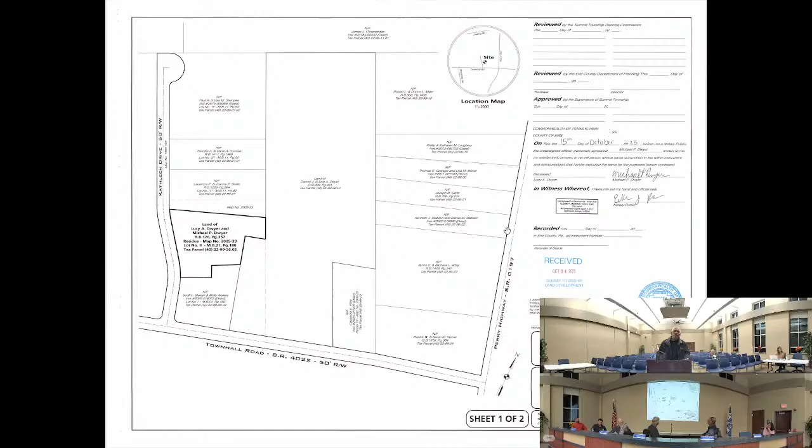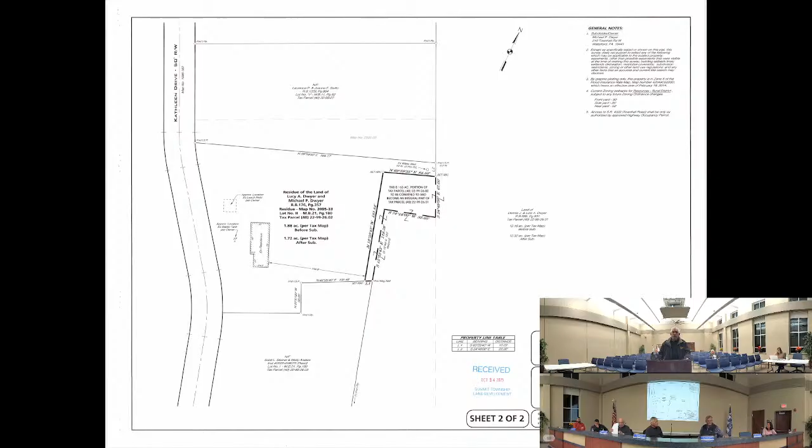Any other questions? Call for a motion. I'll make a motion that we approve as presented. Second. Discussion? All in favor? Aye. Motion carried. Thank you. Next on our agenda is Erie Sports subdivision.

From this project, for several years now, hopefully today we can take a positive step forward. Basically the plan we have presented here today is breaking apart property 300, which is the main parcel of the sports park where the ice hockey rink and that building reside. What's transpired over the course of several years is they legally split the parcel, but it's not actually divided. So it's under one tax ID, but there are two separate owners that have owned the parcel and ran different operations under that same parcel. The piece that we're proposing to break off is the dome facility and the AHN building, as well as the old fun park area.

The reason we're looking to move forward with this is the owner is actually looking to sell the majority of the sports park. So as part of the sale, the people purchasing the property want to have that property divided so it's in their ownership legally and not under someone else's tax ID. The only caveat is we are taking a small part of 305, which is kind of the southern property there, and it wraps up to the side. The reason for that is it's required for the parking ordinance, to maintain the proper parking spaces for the AHN facility. And the piece that we're showing to basically consolidate with the subdivided piece is the old basketball court.

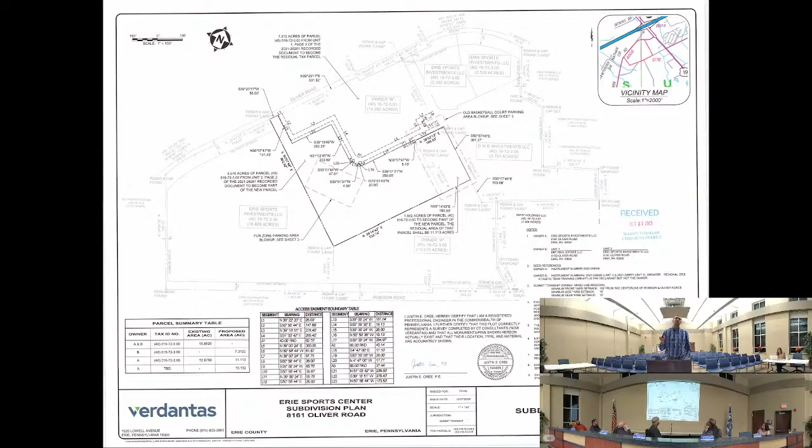Okay, now, so there's no plans to add anything here, right? Correct. So what this dashed line is showing is the existing access agreement, basically for shared access through the property. One of the things we've discussed with Tammy and Matt over the course of this project is keeping that maintained and operable for safety measures, site access for EMS vehicles, things of that nature. All we did was push this out, so it's in compliance with the frontage requirement, which actually perfectly abuts the edge of that access easement.

Now, something else to be aware of, this is kind of just an intermediate step. The future owners, whoever that ends up being, because he has several interested parties, the long-term goal would be to consolidate all of this into one continuous parcel, therefore eliminating this. So we're not done here. No, far from being done. Eliminating the side setbacks and interior setbacks, because ultimately they want to do a lot of development on the property. It's going to be hopefully a great project for the township, but this is kind of the first step as far as selling to an interested buyer.

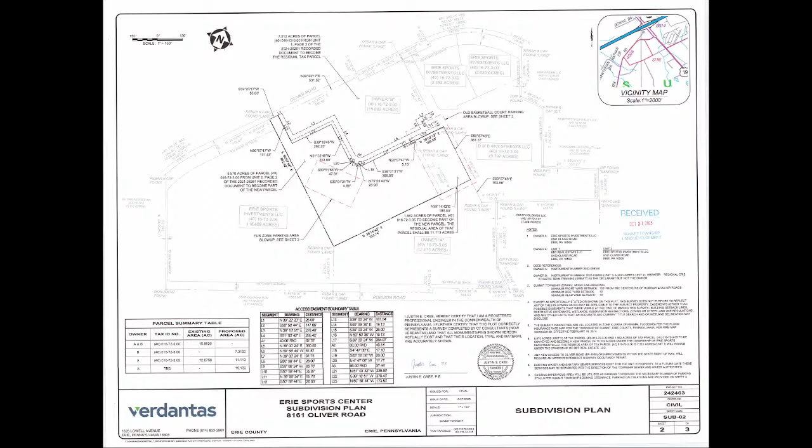Yeah, sure, yeah. The concern was for EMS vehicles. Yes, as you mentioned, I just didn't want to see anybody get boxed in a way that if an emergency happened... these are events that attract large numbers of people. Sure, and lots of times you'll have a lot of vehicles in and out, you know, God forbid should something happen. Yep, so that's my number one concern, and I think there's a lot of moving parts here.

There's all kinds of legal aspects to it. Yeah, part of what's been discussed, again this is kind of all conceptual now, is actually bringing a secondary access down to Robison Road here. We're working with the water authority to develop a new water line through here. So, long-term vision, there'll probably be an additional access point off of Robison that would connect Oliver to Robison.

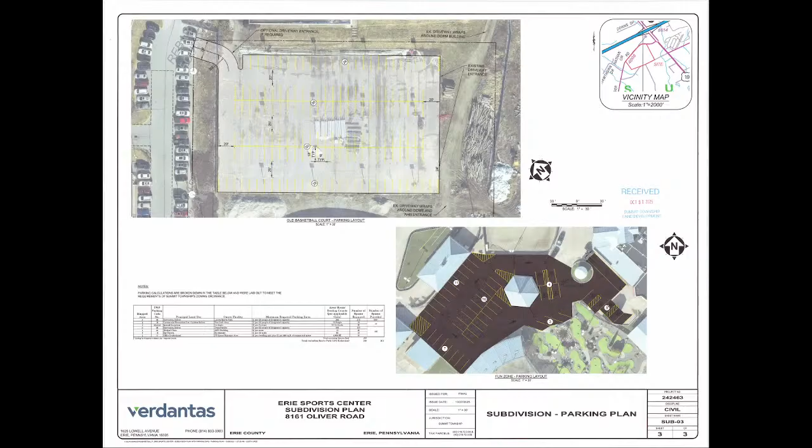So this is basically all existing. There's a slight portion here that is not being utilized. This piece on the back end, maybe there's a foot or two that's not paved currently. And then this is the fun park area. This is kind of that ramp right in the center that I was talking about that you come up to. This is the main entrance, and there's that big golf, soccer ball dome that welcomes you.

And what we showed here is one-way traffic around the concrete pad to meet our existing parking, knowing that, again, this is likely to never be developed as it is, as it's proposed today. It's just a formality, so we're in compliance with the ordinance, but also not skirting any rules, showing something that could be feasible if it needs to be.

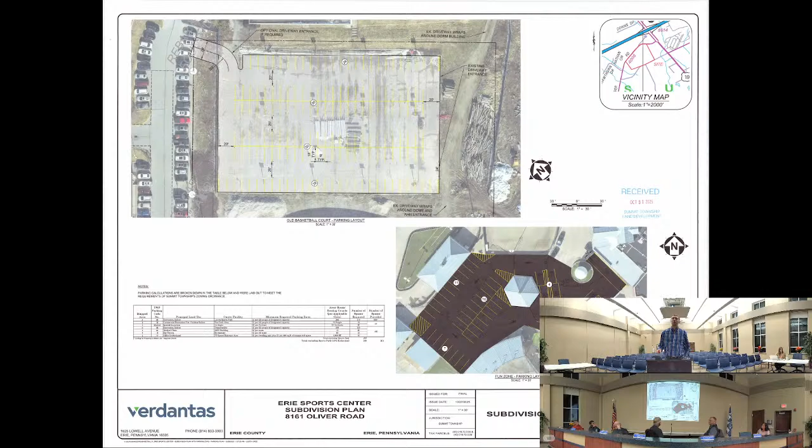And I think, Ron, to your point, this is that driveway here that looped around the dome. Not shown on here, but this loops around and comes right up through here. So there's a driveway in here that wraps around the building. One thing we showed here too is if that wasn't allowed, there's definitely an option to develop a new driveway here, wipe out this berm and these couple parking spots, and actually have a driveway that comes up this front ramp, because this is that other entranceway right here.

How rugged is this right in here? If a vehicle absolutely had to, could it get in there? Or is it around the back, is that what you're asking? Right now this is just a berm hill, there's no actual driveway here. But in an emergency, could a vehicle just bump the curb and go? No, it's too steep, they would have to drive around the back here. Okay, I'm not familiar with that.

So as far as requirements, would that be something we'd need to put in there to have that optional driveway accessible? Because they're showing it as both optional and required.

I'm gonna rain on everybody's parade here. That basketball court still has hoops on it, and looking at it, those hoops are taking up parking spaces. So those will need to be removed. I know we're talking about this as an interim step, but we've had quite a few interim steps that become permanent realities in this township.

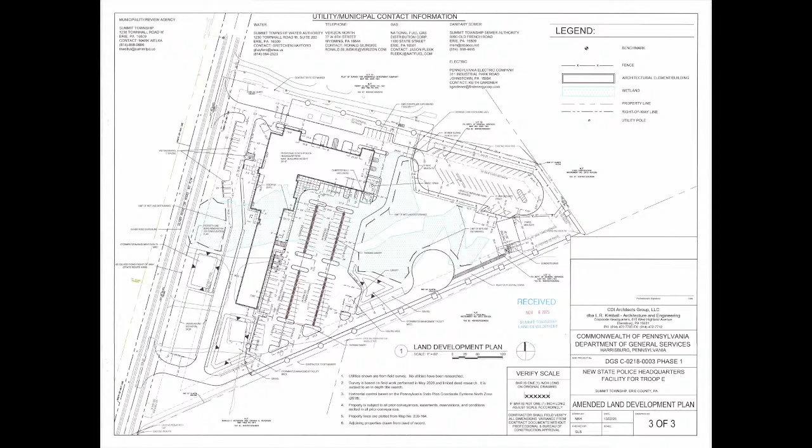That's why I asked the question, because it doesn't seem like there's a whole lot of room. They have more than one facility. They have the above ground here that you can see as you drive by. There's underground here, another above ground here, and then an above ground facility here. So a lot of stormwater going on here.

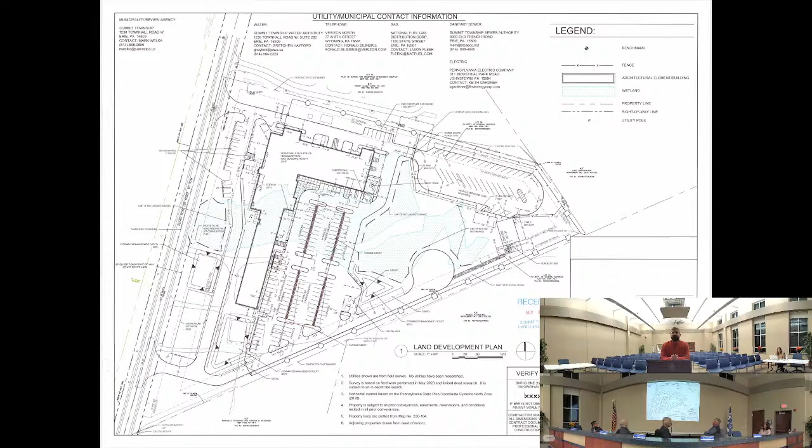I just wish for their sake they had more room, because it looks like they've almost outgrown it already and they have to move. Well, compared to what they have now, this is just a Taj Mahal.

And what I don't understand is why at the 11th hour they want to add this building. I'm sure it had to be planned as an integral part, unless they want to change the complexion of the headquarters building to match the two buildings in Lawrence Park. Tammy can correct me if I'm wrong, but my understanding was this was going to be an add-on in the future, but as they're going along, they found the funding to add it now. So why not put it in while you still have everybody there?

From a law enforcement point of view, to put an evidence storage facility that far from your structure... Originally they wanted to put it up in this area, but with zoning, they didn't want to go through the zoning hearing board process. They're trying to keep things moving. And you have wetlands here that they're trying to protect, so they can't build in this area. So this was kind of like the last buildable spot they had.

Like I said, from a law enforcement standpoint, it doesn't make sense. I don't think they're too keen on the location either, but it's the last area they had. And if they're eventually going to consolidate the crime scene lab in there, they would need a fairly large repository for evidence.